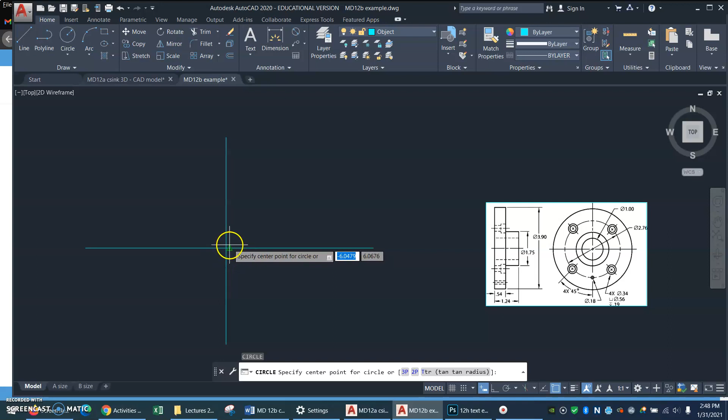And now I will start drawing some circles. I'll draw the outside circle. Let's see here. It says it's 3.9. C for circle, and I want to make sure I'm right on the intersection there. Watch out, you can accidentally land on the wrong spot. So I'm going to use the shift right mouse to bring up my temporary menu and find intersection right there.

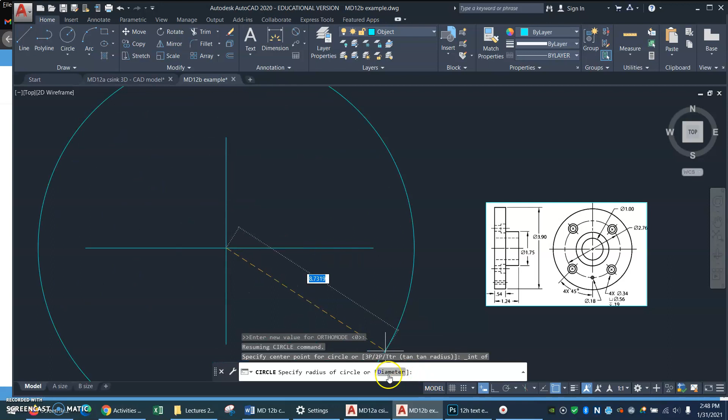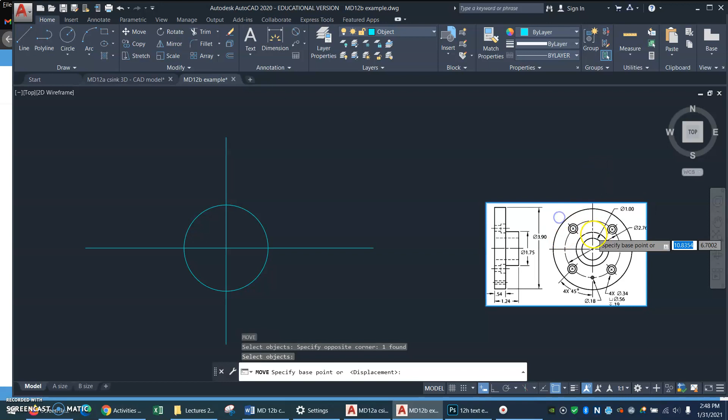Intersection. Now I want diameter, D for diameter, 3.9. Okay? Well, that's how big it is. And now, let me move this over just a little bit. This is too far away. Okay. Let me now make my counterbore hole stuff.

Those counterbore holes are on a bolt circle that is 2.76 in diameter. So C for circle, make sure I'm on the intersection there. Diameter 2.76. There's my bolt circle. Now I want these 4 holes at 45-degree angles.

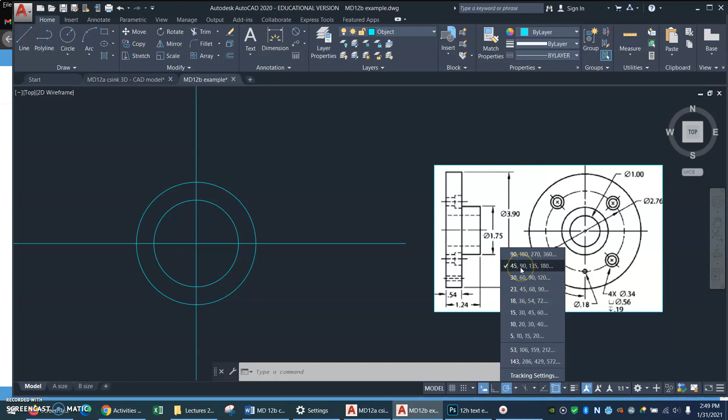I think I will turn on polar tracking, and let's see what I have my angle set at. Ooh, I have it set at 45 degrees already. That'll be handy. Okay, so polar tracking is on. I will draw a line from the center out, and when I get close to 45 degrees, see how that ghost line snaps in there? That is really, whoops, stop that.

There we go. And I'll do another one out here. And when I get close to 45, my ghost line snaps in there. All right. Looks like the outer circle is a diameter of 0.56. Diameter 0.56. And my inner circle is a diameter of 0.34. You know what I'm going to do? Well, yeah, I'm going to be cool and show you copy rotate.

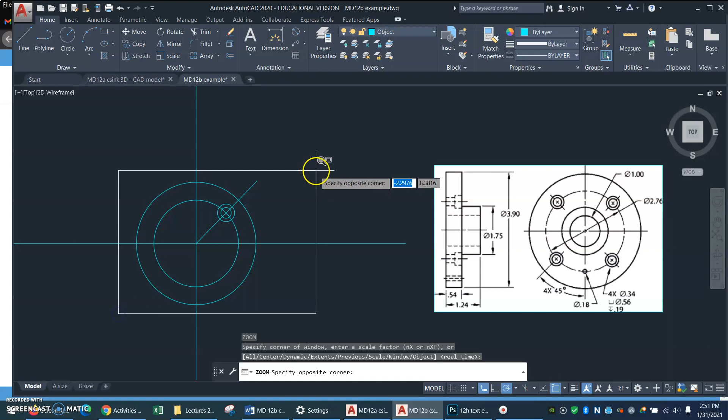Okay, now I need to make my center line in there, just a little short center line. So what I'm going to do is zoom in here, and I like to be all uniform, so I'm going to make a temporary construction line right there for trimming my center line. I'll click on that line that's going to be a center line, and then I'll select center from the layer just so I can keep track of what's happening.

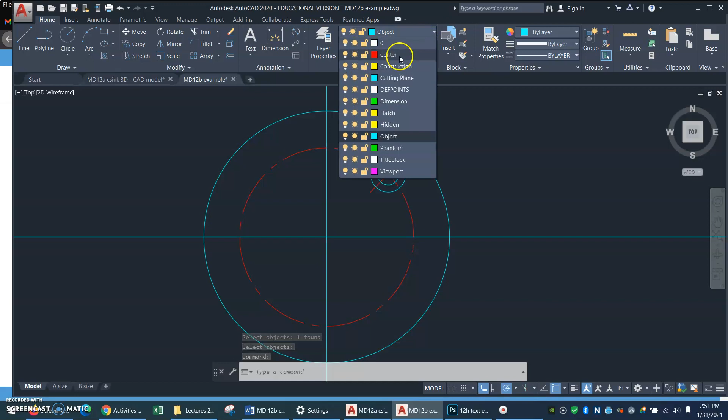And now I will do TR for trim. I will select my temporary circle as my cutter, and I'll click those 2 lines. And now I will E for erase and erase my temporary construction line because I don't need it. Oh, that's good. I think I will also click on my bolt circle and select center line so I can see that that's on a center layer.

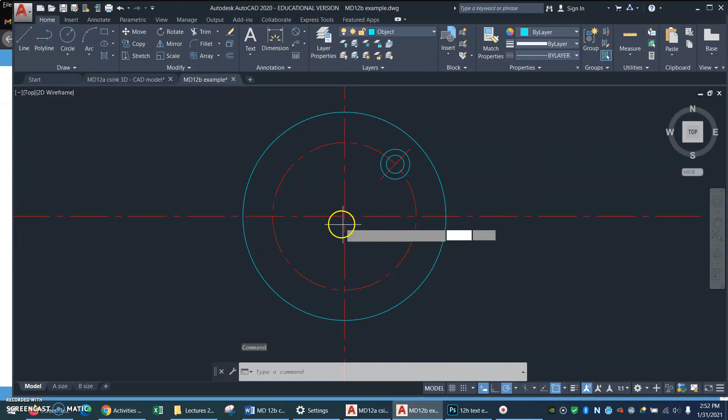Now, before I get crazy, how about if I fix up my 0 and 90 center line stuff. So I will right crossing window to select them both at once, and then drop down my layer list and pick center. Now they're on the right layer. Now I think I will make a temporary construction line for trimming my center line things. I don't know how big it is, I just made it something or other.

Now I'll do TR for trim, or I'll select the scissors, and I'll make my construction line circle my cutter, enter, and now I will trim my 4 center lines, enter, and I'll E for erase, or eraser up here, and remove my temporary construction line.

Alrighty? Now let me make 3 more copies of this hole with my little short line. You know, there's an array way to do this. I should have practiced that before I showed you. So I'm not going to. I'm going to just do rotate copy, because I know how to do that. There's rotate, or RO for rotate. Select objects, enter. Select base point, okay.

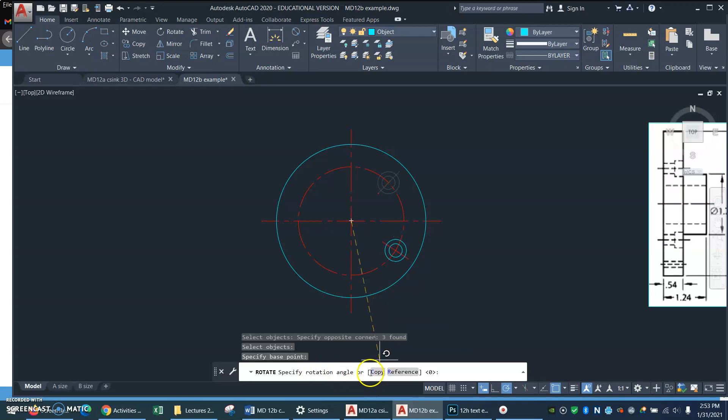Now, instead of just telling it the angle, I'm going to tell it copy, or C for copy. And now I can tell it the rotation angle. I'll tell it 90 because I want it to come over here. But because I said copy first, it kept the original one and made a copy.

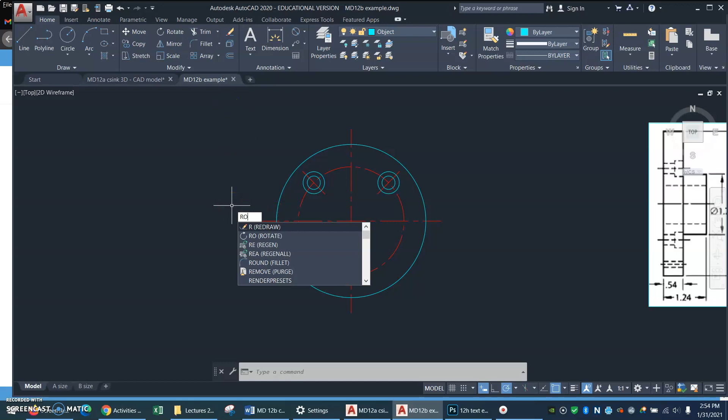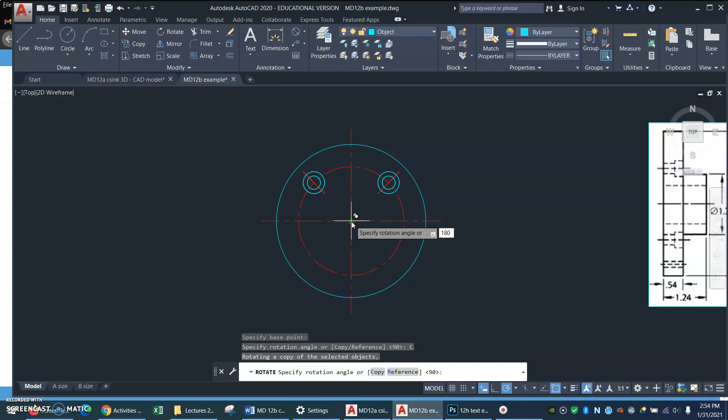Now I think I will rotate again, RO, select those 2, enter, select base point. I want to make sure I get the right base point. And I'm going to do C for copy. And this time I'll rotate these guys, what do I want to do? 180, because I want copies down there on the bottom. Looky there. Oh yeah.

Now, what else? Oh, I need my little set screw circle. And remember, we're going to make that here on this side so that we can have a good looking side view. D for diameter, 0.18. There's that thing.

Now I'll put in this hub thing. I'm looking in this circular view and I see the diameter of the hole, but I don't see the outside diameter of this hub. You know why? Because this guy is showing the outside diameter of the hub over in this side view. You can see how it is helpful for people reading your drawing if you put all the dimensions related to some feature together. So we had to go hunting around for the 1 and the 1 3/4. That wasn't helpful. Okay, anyway.

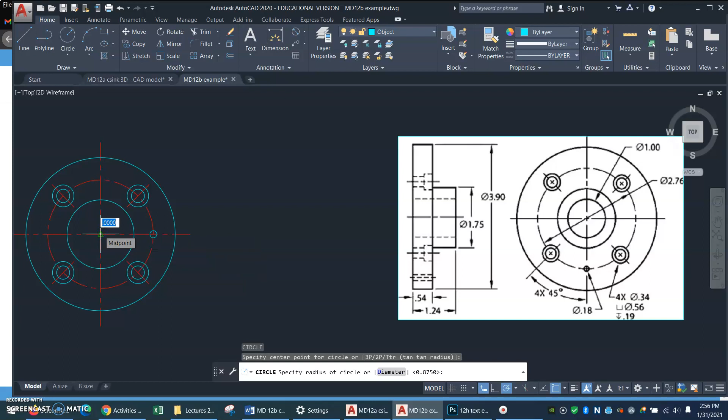C, and I'm on the midpoint. That's probably right, but I'm not taking a chance. I'm going to go for either the center of the circle or the intersection. There's the center of the circle. D for diameter, 1 3/4. Circle was my last command, so I'll just hit enter to bring it up again. And I'll locate it at that center point. D for diameter, 1. Okay, there's my hub thing.

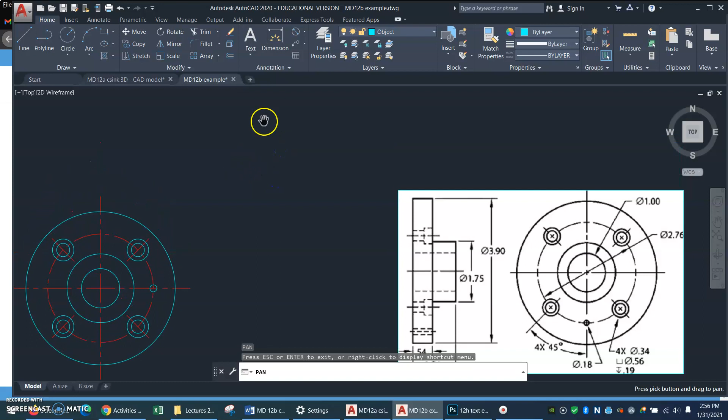All right, let's look at how to put this counterbore callout on here. I'm going to switch to the dimension layer, and in the list of dimension commands, I'm going to get the diameter command. I could use a leader line too, but I'm going to go for the diameter. And I'm going to click on this outside circle. And notice how AutoCAD automatically has the leader pointing to the center of that hole. That's good. But oh boy, I need some more stuff here.

So I'm going to select MText, or type M for MText, so that I can go into the MText editor. And notice as soon as I did that, the ribbon at the top changed to the MText ribbon. All right. Oh, sorry. There's my text way down there. It was because I was showing you stuff and it got all goobered. Okay. Let me do that again. M for MText. Okay.

Now I'm going to start right here and enter the size of my small hole. 4 times space diameter. How do I get the diameter symbol? Well, I might remember what to type, but if I don't remember, I'll go up here to this symbol thing, and where I see, oh yes, %%C, I think of it as C for circle. That's how I could get the diameter symbol. 0.34. I'm going to enter .340.

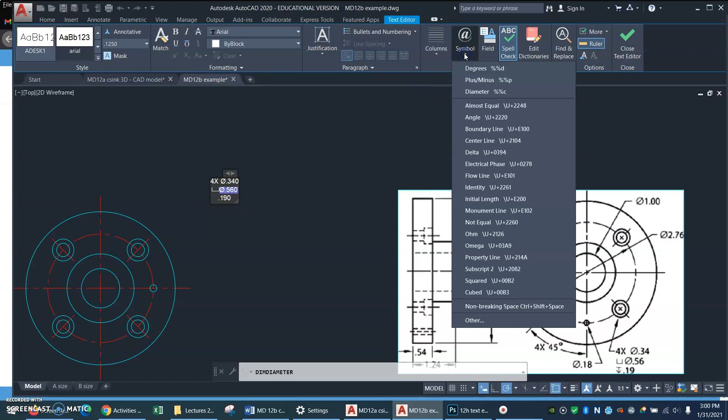I can right-click and select paste, or I can just do Control V. So there's my counterbore symbol. I'll backspace so that it's all on one line. And drop down to the next line, and now I'll go look for my depth symbol. So my cursor's in the right spot. Symbol, Other, AIGDT. There's my depth symbol. Click, select, copy. Now it's in my computer's clipboard.

It doesn't show up yet until I do a paste. Right mouse click or type Control V and back up again so that it's all on one line. Hooray! Looks like everything is there. I can close the text editor, and there is my dimension. Looking good.

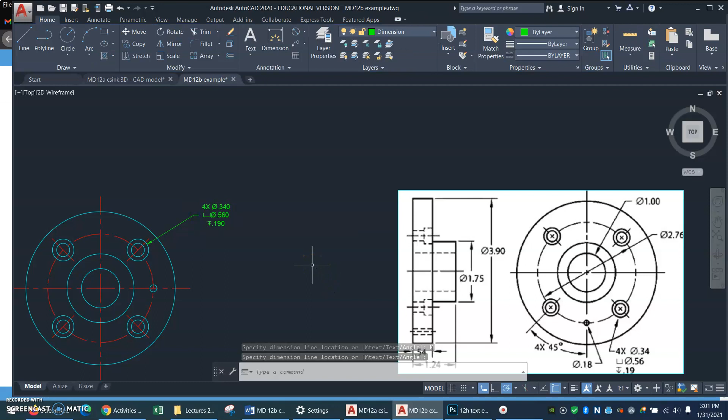Now, if I have a few minutes here, I don't really, I could start drawing my side view. I think I would come over here and start doing that. So a line here, offset 0.54, that way. Now I'll offset 1.24, coming back this way, and that'll get me to my hub.

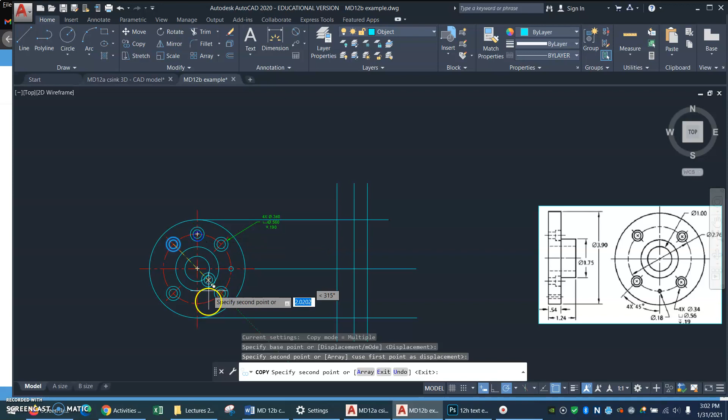And now I can start running construction lines from my front view into this view. I'm going to need to place a copy temporarily of these 2 holes up here at the top and the bottom, just to make it easy for me to